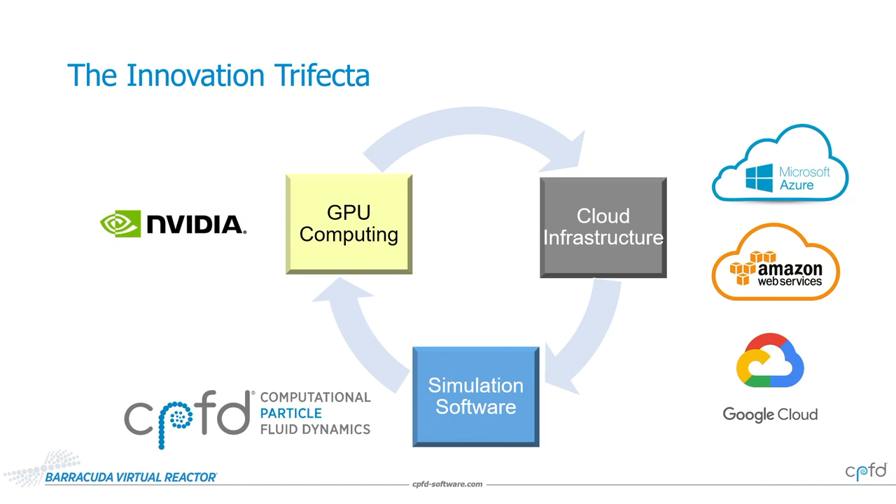The third is advanced simulation software, and this is where my company, CPFD Software, integrates into this ecosystem. We were a very early adopter of GPU technology, and to give you some idea of what that has meant, we are able to run simulations over 1,000 times faster than we were able to do with previous generations of computer hardware. What this means, for instance, is that a simulation that in the past may have taken a month to complete can now be done in a few hours.

So before we go into the energy industry, let's for a few minutes just consider how these technologies are having an impact on other industries. And the industry I've selected here is the aerospace industry. Now, we're living through a very interesting time in aerospace because a number of private companies have used digital technologies like the ones I described to become the leading innovators in a field, space exploration, that was once exclusively the domain of national government agencies such as NASA that had access to vast amounts of funding.

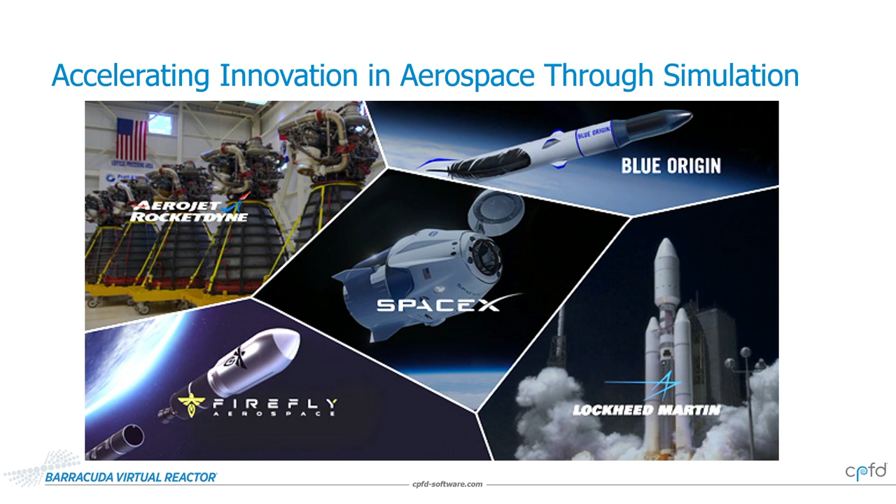To take an example of SpaceX, SpaceX is now on its 7th rocket version, and it has used digital technologies to reduce the development time from 6 years to about 2 years, which is a significant improvement. But let's now talk about a true startup in this industry. And the company I've selected over here is a company called Boom.

Now, Boom is developing a supersonic passenger jet, and it expects to do so in half the time and at a fraction of the cost of the last supersonic jet, which was Concorde. And to give you some perspective here, Concorde took 30 years and over $5 billion with a lot of support from the governments of the United Kingdom and France to bring to the market. So let me repeat, Boom is a startup company that is developing a supersonic jet. And one of the reasons it's able to do so is through the use of computing and simulation.

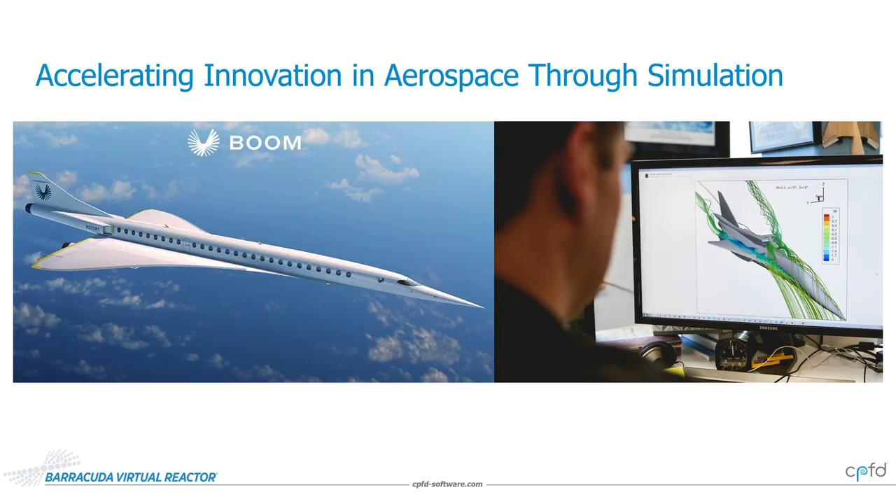And one of the most important simulation methods that Boom uses is that of computational fluid dynamics, or CFD. And what this does, it enables the engineer that is working on the design of the aircraft to make the aerodynamic design on a computer rather than the old way, which was through building a physical prototype and then testing it in a wind tunnel. To explain to you what this means in practice: if you take a passenger aircraft, a 5% reduction in drag translates into 500,000 gallons of fuel consumption, which in turn means about $3 million in cost reduction per year per aircraft.

Now, what Boom is able to do is use CFD simulation to go through hundreds of designs of aircraft, select the best one, and move on to the next iteration. To date, this company has already run 66 million hours of compute time testing the design of various aircraft.

While aerospace was the first industry to widely adopt the use of CFD, it was followed very quickly by the automotive industry. And today, in both the automotive and aerospace industries, CFD has become an indispensable part of the design. And what it has done is it has largely replaced what you will see here, which is wind tunnel testing, which was the old way of doing things.

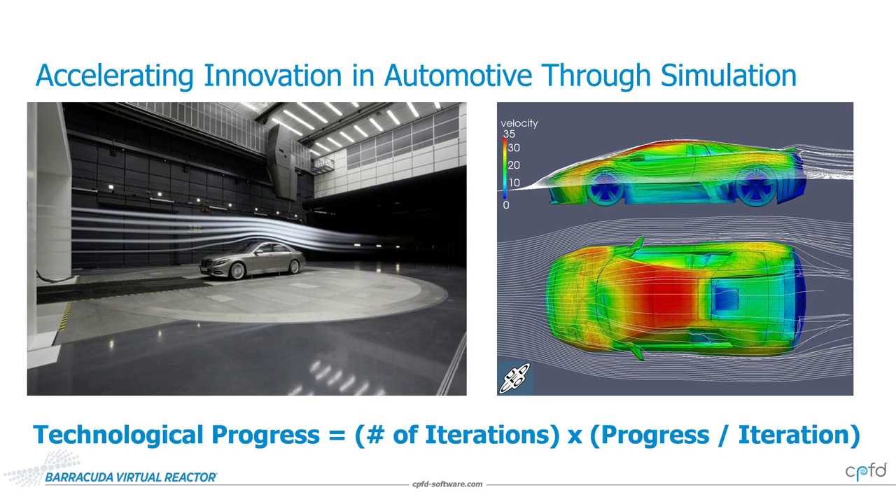So now let's step into our world, which is the world of energy and energy-intensive industries. And this is where things actually get far more complex and challenging. The examples I gave you from aerodynamic design are actually a relatively simple CFD application. And the reason for that is you are dealing with a single-phase flow, namely that of air flowing over an aircraft body or a car.

When dealing with energy systems, we are often dealing with multi-phase flows because inside of a reactor, you could have liquids, solids, as well as gases. You've got to consider the mixing and turbulence of those flows. There's phenomena like heat transfer, mass transfer. A lot of these reactors are running under conditions of very high temperature and pressure, so things like thermodynamics, catalysis, reactions, those are all important phenomena that need to be considered.

And this is where my company, CPFD, has developed a software package called Barracuda Virtual Reactor, which integrates all of these different chemical and physical phenomena to serve the needs of the energy and energy-intensive industries. And this video over here gives you an example of one such simulation. This one is taken from an FCC riser. And I'll talk more about FCCs in a later example.

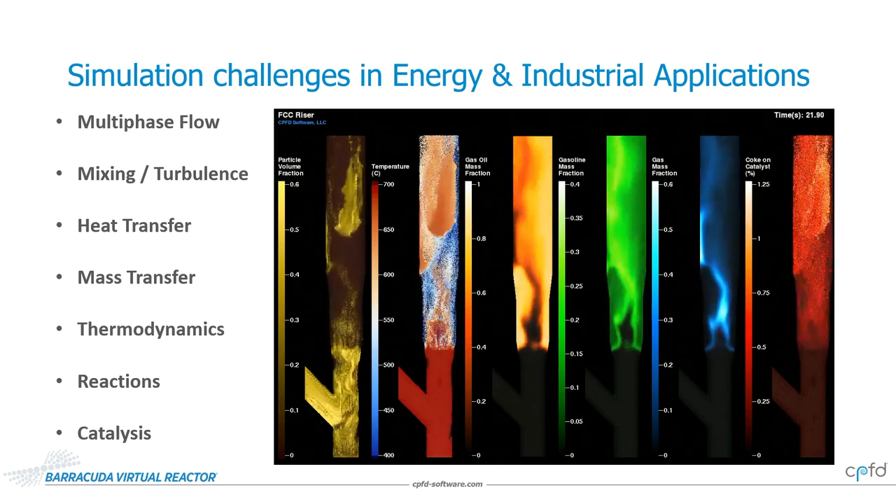So let's now consider some use cases. And the first one is that of the scale-up of the Sierra waste-to-biofuel plant. This is an aerial image of the Sierra biorefinery that was constructed. The construction was complete in July of 2021, so it's very new. It is located in the state of Nevada, very close to Reno, here in the United States.

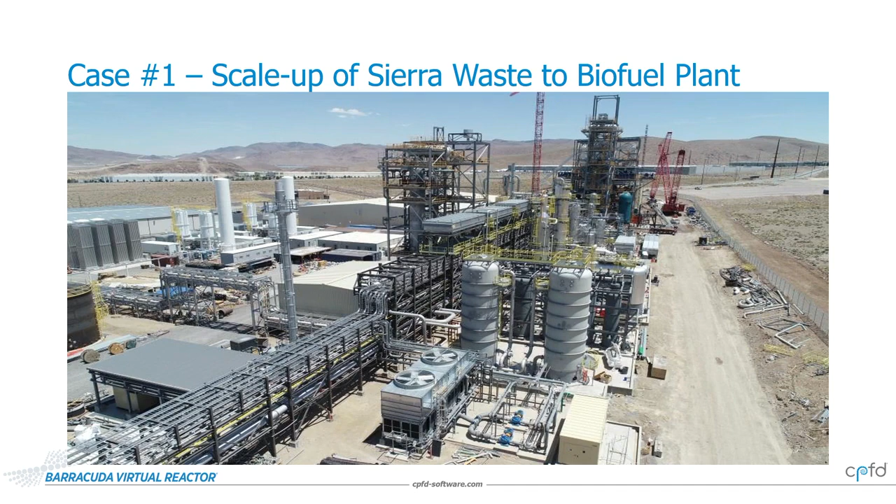And this is the world's first garbage-to-jet fuel plant. It was constructed by a company called Fulcrum Bioenergy. And when it is fully operational later this year, it expects to convert 175,000 tons of municipal solid waste, essentially trash, into 11 million gallons of renewable biofuel per year.

Now, at the very heart of the Sierra biofuel plant process is a unit called the gasifier. And what happens in this particular unit, you'll see it here in the diagram on the left, is that the feedstock, which is the trash, enters and is ultimately converted into a synthetic gas after going through multiple gasification units. This is the most complex and challenging part of this process. That synthetic gas is later converted into liquid fuel.

And what you'll see here is a picture of the process demonstration unit that was used for testing this before taking it to the fully commercial level. Now, for a lot of very promising technologies that get developed in labs, one of the biggest challenges is scaling up. In fact, for many chemical and process-related technologies, the valley of death is really that scale-up process. They could work very well in a lab environment, delivering good yield, but when it's taken to the full-scale level, that is when a lot of technologies do not deliver what they were intended to do, and consequently are never commercialized.

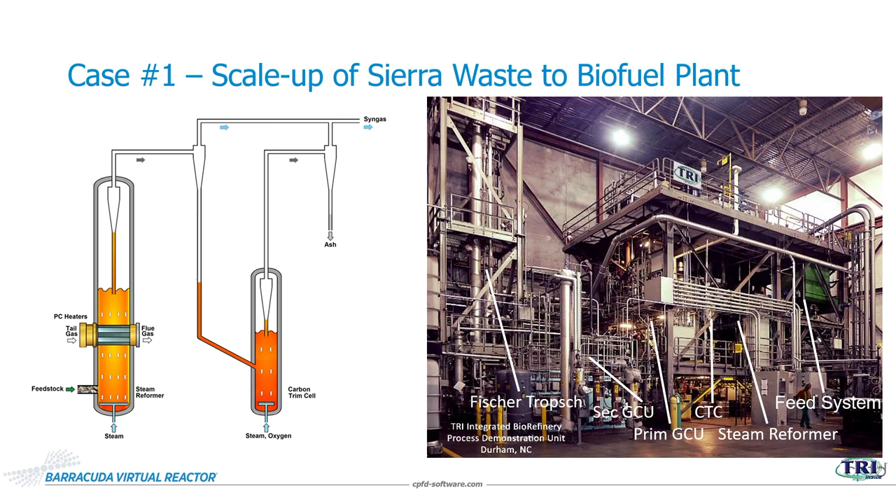And the reason for this is in this scale-up process, there are numerous variables and factors to be considered. So to give you some example, when you're scaling up a chemical-related process, you've got things such as the unit design parameters to consider, the height, the width of the unit. You've got the staging of various internals. You've got feedstock parameters. You've got operating conditions. And if you were to consider a unit with, let's say, 10 variables with 3 options for each, if one were to test all of the possible configurations, one would need to conduct nearly 60,000 tests, something that would be impossible in the physical world, but it is feasible in the digital world.

And that's exactly what Fulcrum Bioenergy and its partners did with the Sierra plant. And what you will see here in this video is one of those simulations that was run using Barracuda Virtual Reactor. And the conclusion I will tell you from this is that the scale-up of this very novel technology would have been impossible without the use of digital simulation and testing. If physical testing was required, this would never be developed in a commercially relevant timescale.

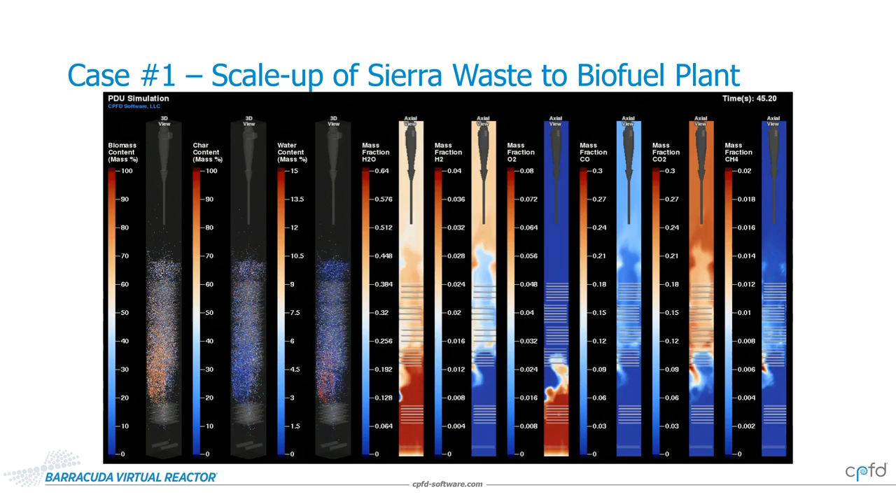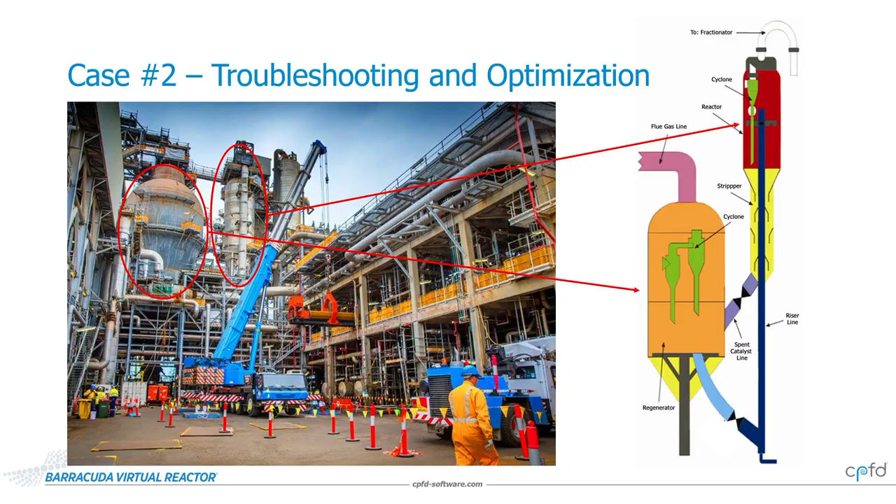And just very briefly, if I could, I'll explain to you what's happening over here. So this is the main reactor. You'll see it in the diagram here. Also, it's the taller one in the picture. And what's happening in this reactor, as the name suggests, it's a fluidized catalytic cracking process. So cracking being breaking the larger chains of hydrocarbons into smaller chains by use of a catalyst that is fluidized. During that reaction, the catalyst gets coated with carbon as it is used in that reaction.

That spent catalyst then gets transferred over to another unit over here called the regenerator. And you'll see it here in the actual picture there. Within the regenerator, that catalyst undergoes a combustion process whereby the carbon is essentially burnt off, and that catalyst is also heated during that combustion process. By doing so, it's then reactivated. The reactivated catalyst is then circulated back to the main reactor for use for the process again. So the real elegance of this system is that it's a closed-loop system, and these FCC units, they're the real workhorse of a modern refinery.

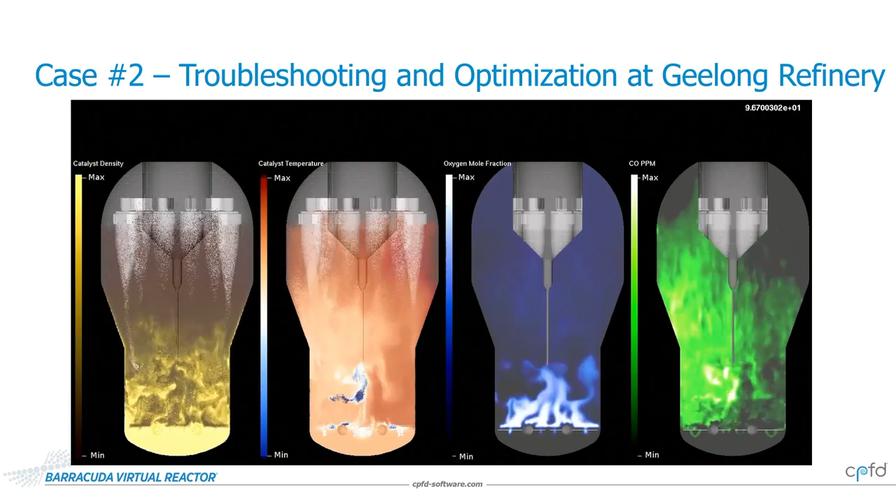So lastly, I'd like to talk about the future, and what we're seeing right now is that a number of companies and laboratories are using simulation for fundamental R&D. They're using this to test, design, and scale a number of technologies that will be essential to our energy transition. And so we have experienced the use of simulation for ammonia, biofuels, carbon capture and sequestration, cement production, chemical looping combustion, emissions control, energy storage systems, gasification, hydrogen, polysilicon, pyrolysis, recycling of plastics and batteries, and the waste conversion to energy, fuel, and chemicals.

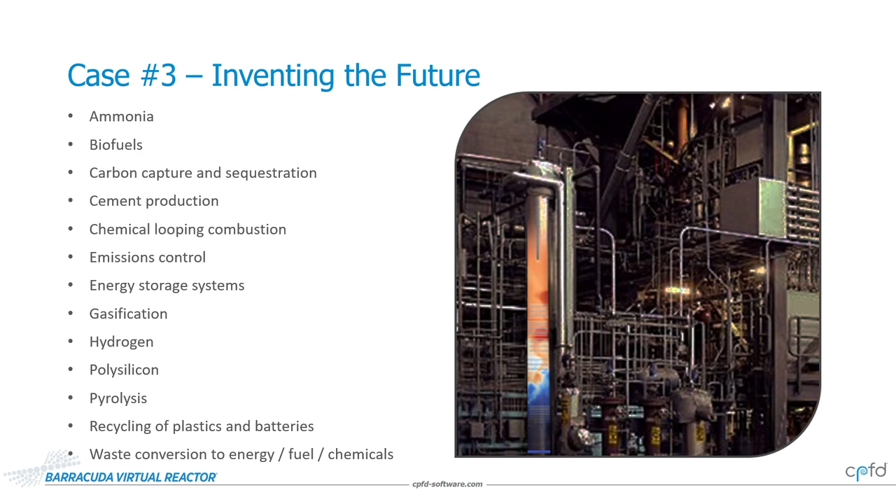One of the things that I'm very optimistic about is that, as opposed to the past, where it was largely big multinational companies that were undergoing this research, what we're seeing now is a large number of small startup companies that, using advanced computing with cloud infrastructure, are able to undertake fundamental R&D in these fields. And that leaves me very encouraged about the future.

So to conclude, I hope that during the course of this session, I've been able to explain to you how engineers today are able to use digital technologies to advance technology by increasing both the number of iterations they can perform as well as the progress that can be made between iterations.